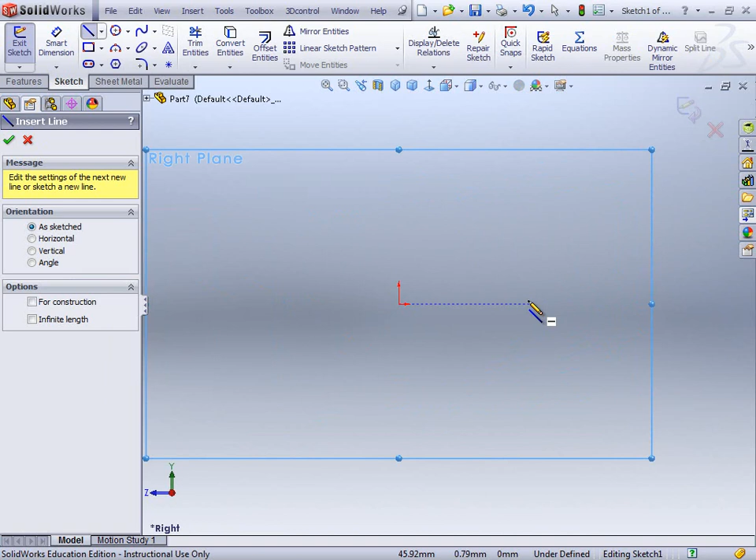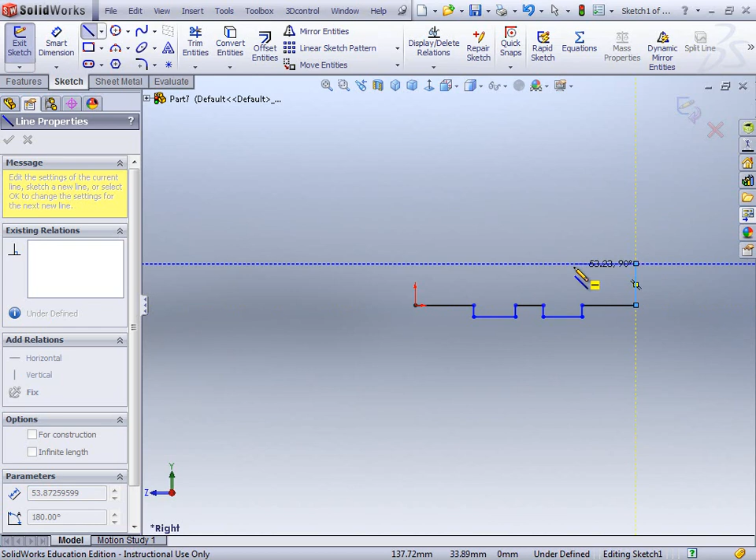Okay, so if we start off on the correct plane this time, on the right plane, and zoom into it, and again just try and keep a bit of proportion to it, so it's about 50, about 10, kind of keeping it roughly to the right sizes. And then you can just sort of fly on then, hopefully you'll get the correct sizes. That's a rough idea of it.

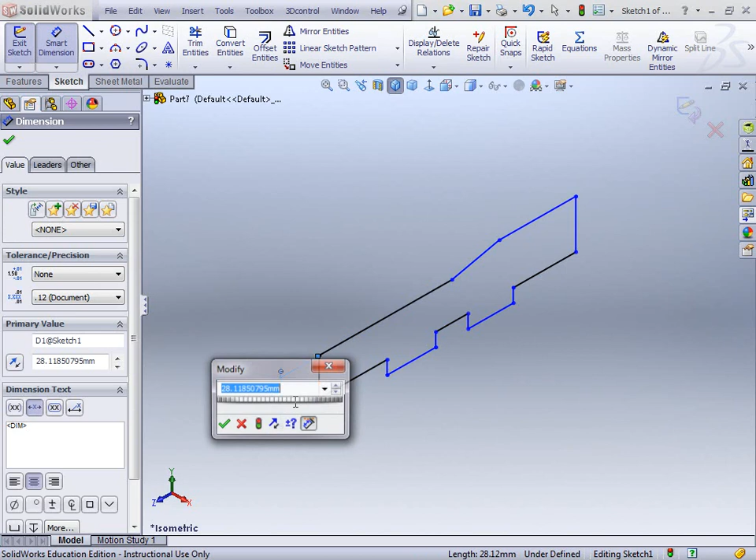Pop in a few dimensions then. So it's 25, 40, 25 again, 37, overall there is 100, and that's 10, and that's 60.

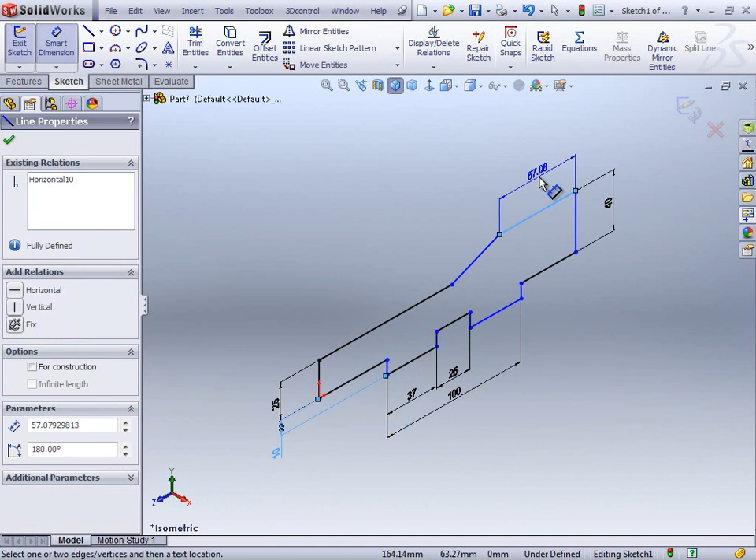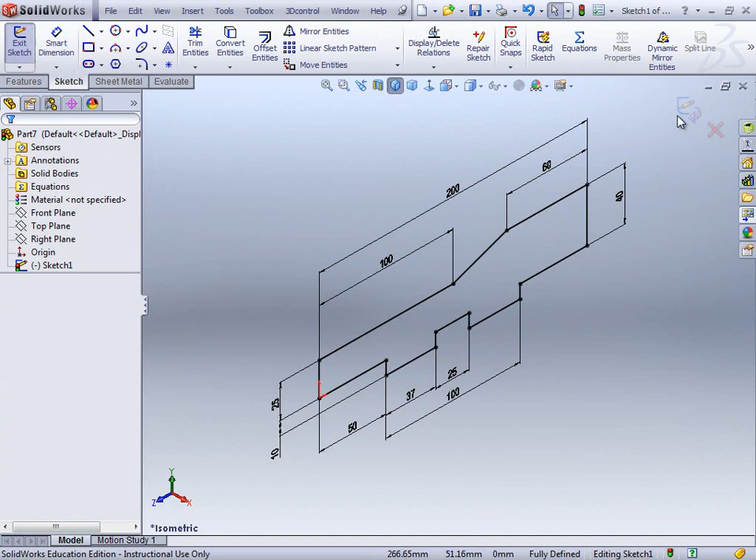Then it's 200, and it's going to be 50, and then just do a collinear on these two, and exit the sketch then, and extrude it. It's 100. Let's check that. Yep.

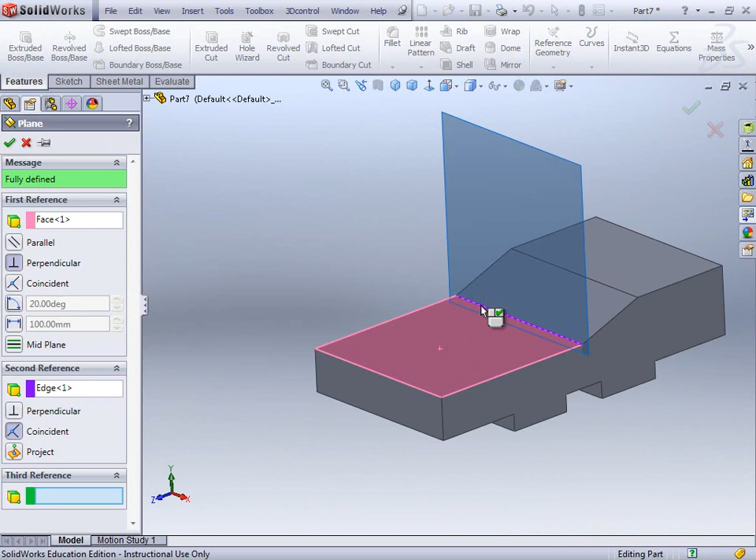So extruded 100. Okay, so we have to draw a little feature at a slightly offset angle, so we're going to need a bit of reference geometry, a new plane, so selecting this face and that edge, and 20 degrees, and we just flip the angle on that to get the right angle on that.

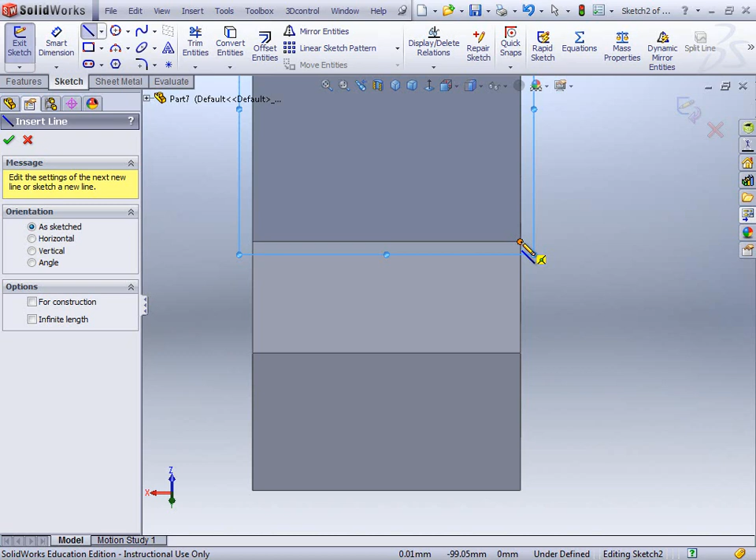And I can do a sketch then, just go normal to on this. Again, keep it roughly in proportion. Oops. Again, so what's that, 50? And the distance from there to there then is going to be 30, isn't it?

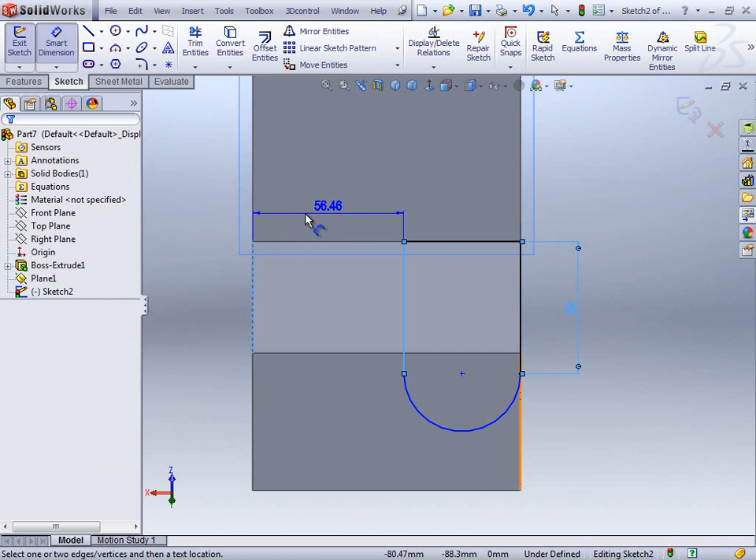And exit the sketch, and extrude boss base. And we have to go up to next on this, but you see the direction is kind of flipping in. I don't get up to next, so I need to just flip to next, because there is no next coming in that direction. Now I get up to next, and click OK. And I can get rid of that, I don't need that anymore.

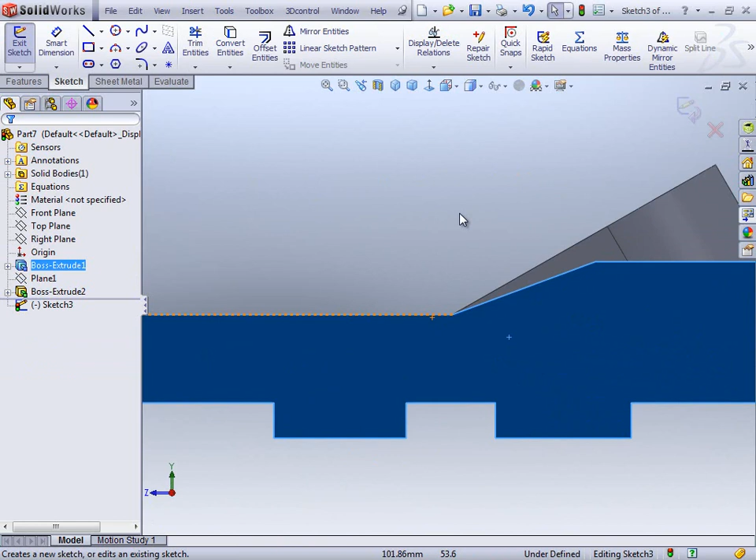Okay, so what's next? So do a sketch on that surface there. We do this little arc, so it's a little 3-point arc, somewhere there, and approximately there. And convert entities on these, because we need these little edges as well. And we trim on that.

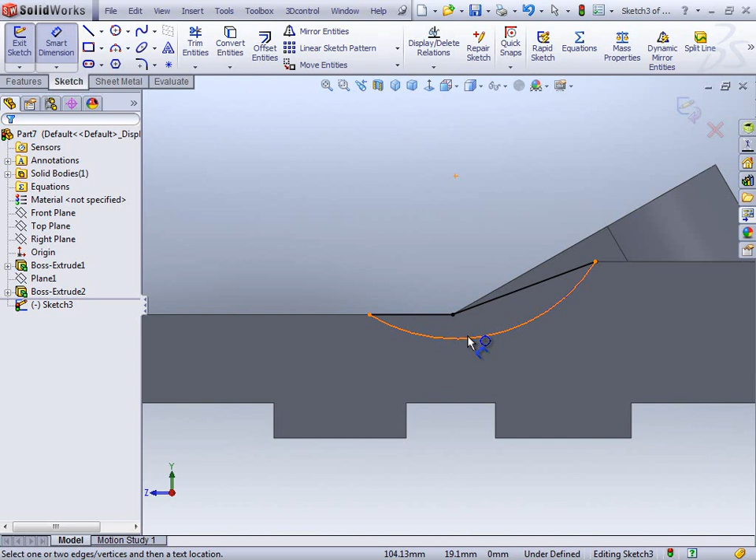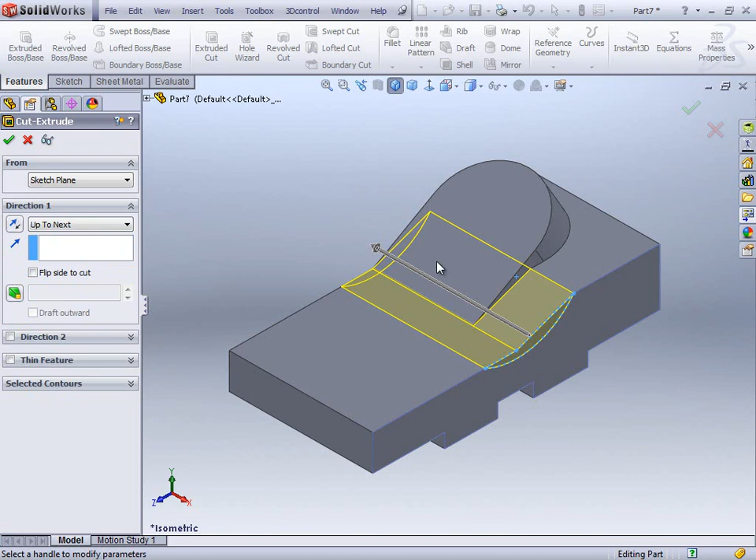Now we can pop in the dimensions. So this is a radius of 50, and it's 45 from there to there, and it's fully defined. And I can exit the sketch and extrude cut then, and we can go up to next, or we can go up the surface.

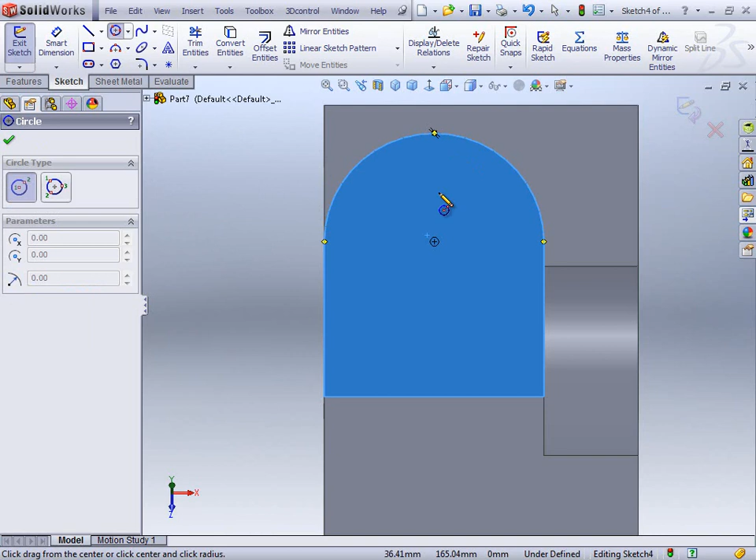Okay, so that's my next thing. I think sketch on this face, yeah. So sketch on that face, just go normal to, and pop in the little circle, wake up that center, and pop in a little circle that's 25 diameter. And this time I'll just pop in a couple of little center lines, latching onto the quadrants there of that arc.

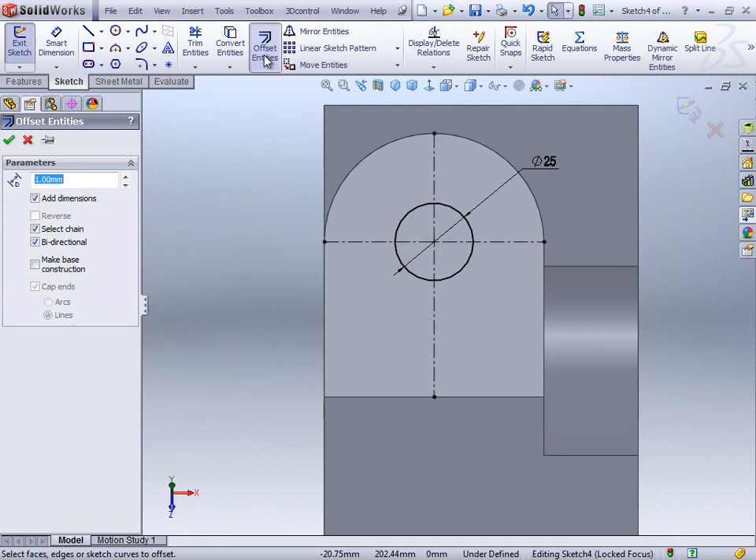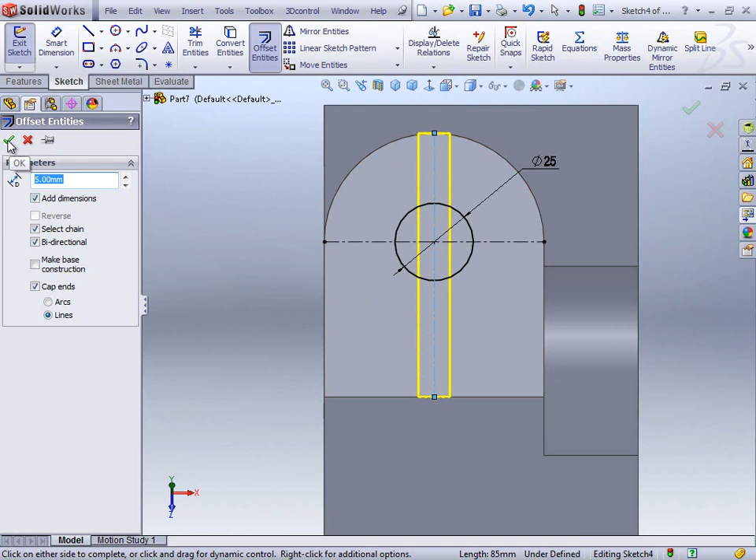And then if I choose offset entities and make it bidirectional, and if I do 5, yep, so select that, and cap ends and do straight lines, I can get that sort of rectangle going on there that's symmetric with the whole thing. So click OK on that and do the same then, offset entities, select that, bidirectional, cap ends with just straight lines as opposed to arcs.

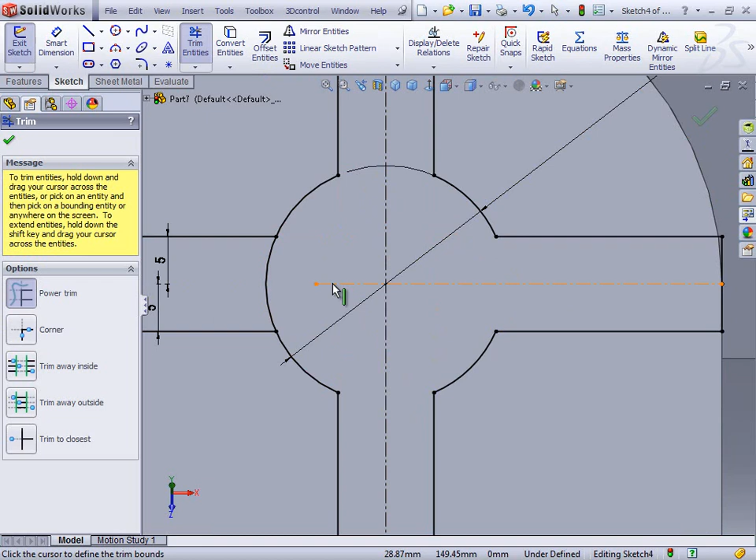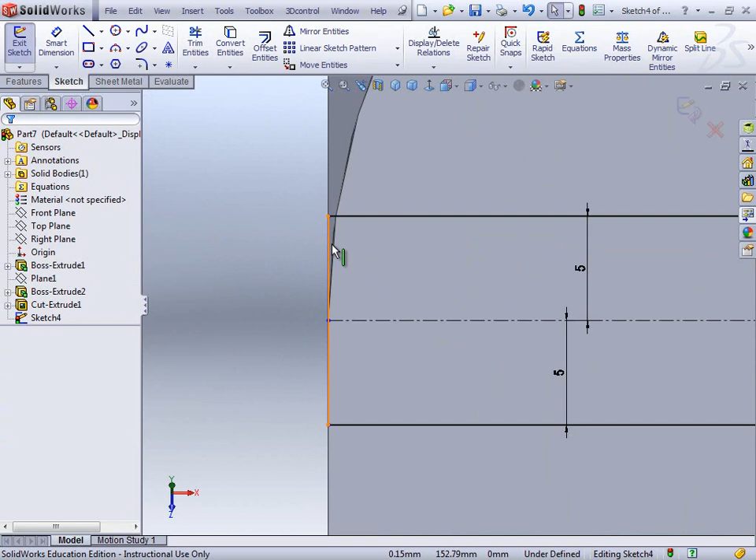Click OK, and then we can zoom in and do a load of trimming. Didn't mean to trim that line, but oops. Trim again. See, I trimmed that line too much there now, so I'm going to have to go in and fix this. You see, that's kind of gone away from there, so I just have to fix that again. Grab that and pull it away and bring it again, because I trimmed off that little center line there. Shouldn't have done that. So that's the little cross done.

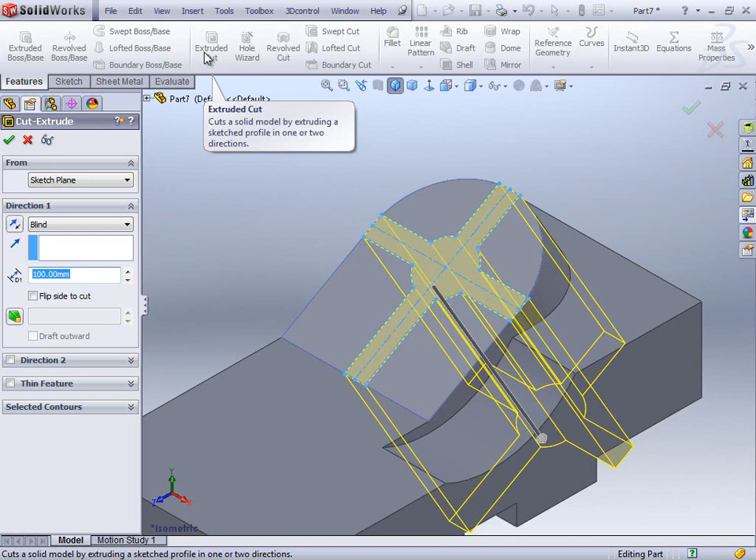And I can exit the sketch and extrude cut a distance of, go find out what this is, I think it's 5 mil. Yep, 5 mil deep. So 5 mil, and that's that.

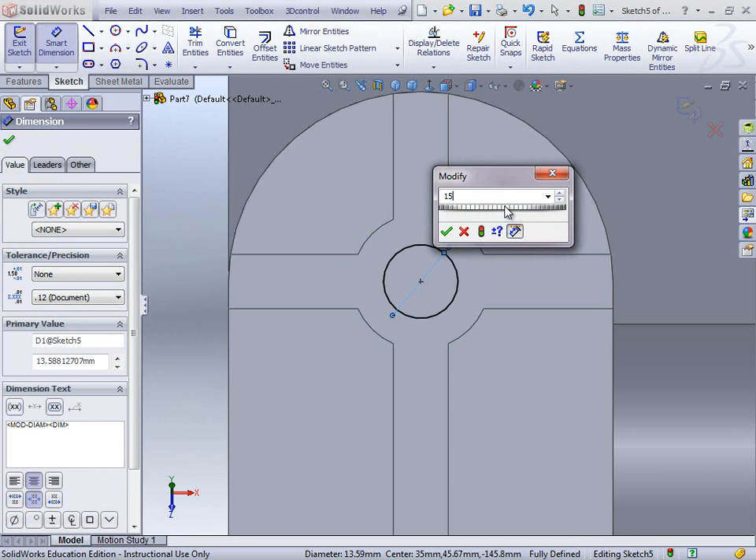Then do a sketch on that surface, and circle, pick up that again. So the circle on this, which is a diameter of 15. And this one's extruded cut through all. Isometric. And that's that. So next one then is over here.

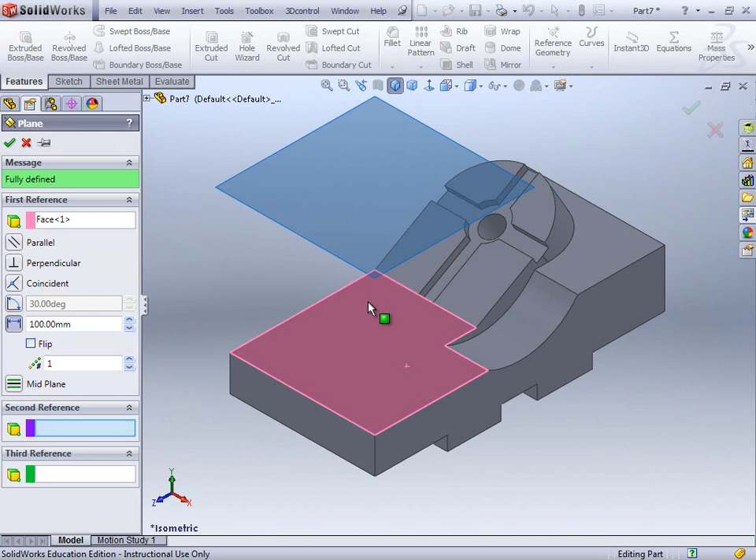So I need another plane, so I need reference geometry of that face and that edge. And I think this is an angle of 30 degrees. Again, I'll flip the direction and click OK and do sketch on that surface.

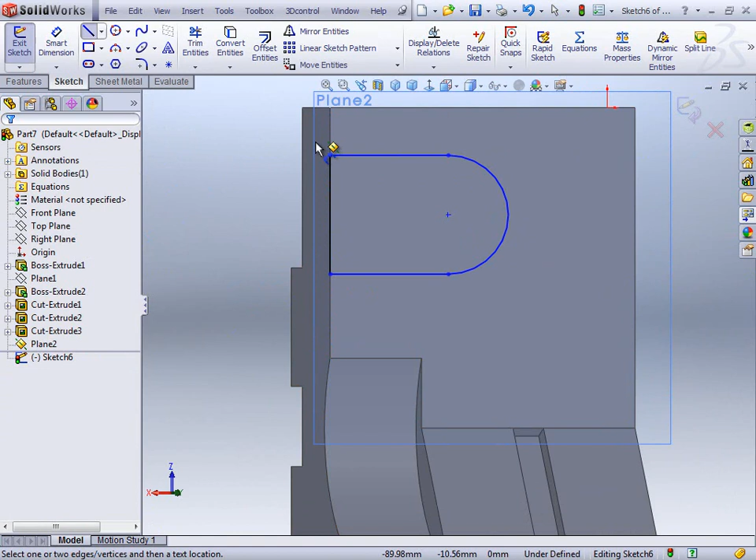And the shape. And it's a 25 rad. Fix that before I went too small there. See, that's one, fix that 15. And I suppose that is 40.

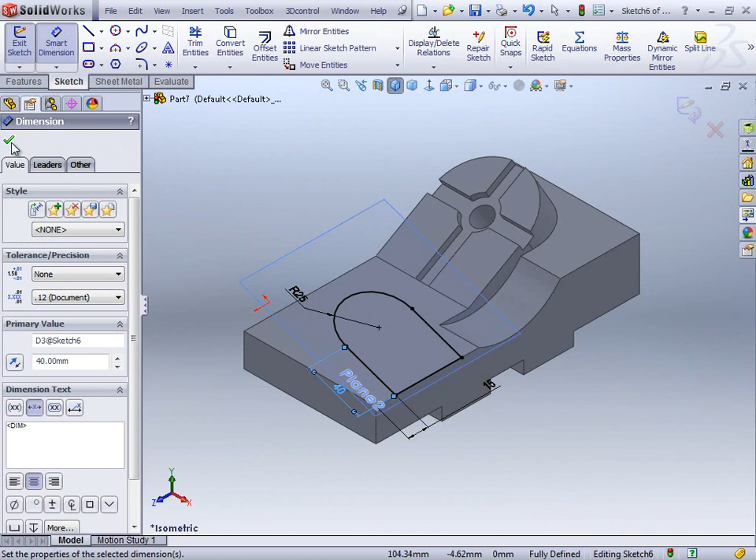And I can exit that sketch again. Just hide that plane, I don't need that anymore. And I'm going to just do an extrude then on that. Flip the direction and again up to next. Okie doke.

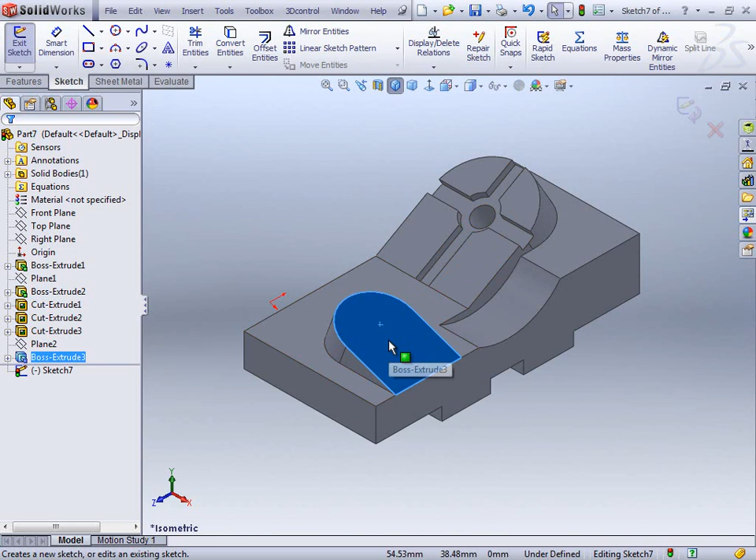And then I should have, what's next? 25 mil boss on this surface. So normal, draw a circle. And 25 diameter. And it's just an extrude, blind extrude 15.

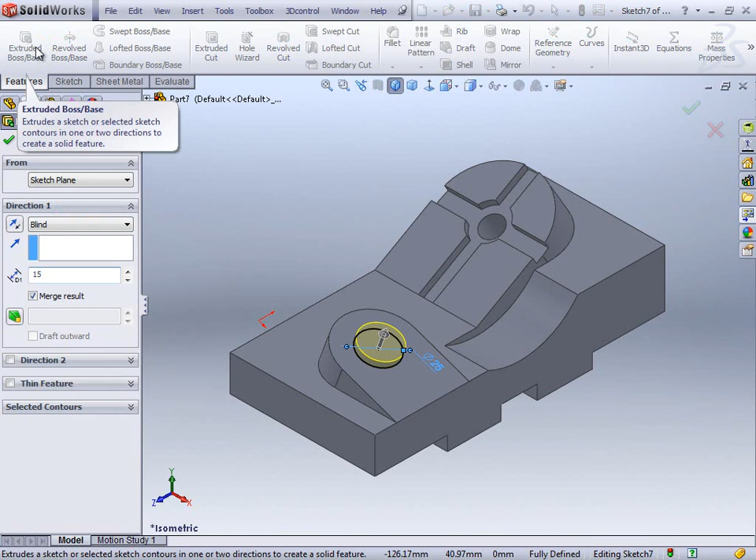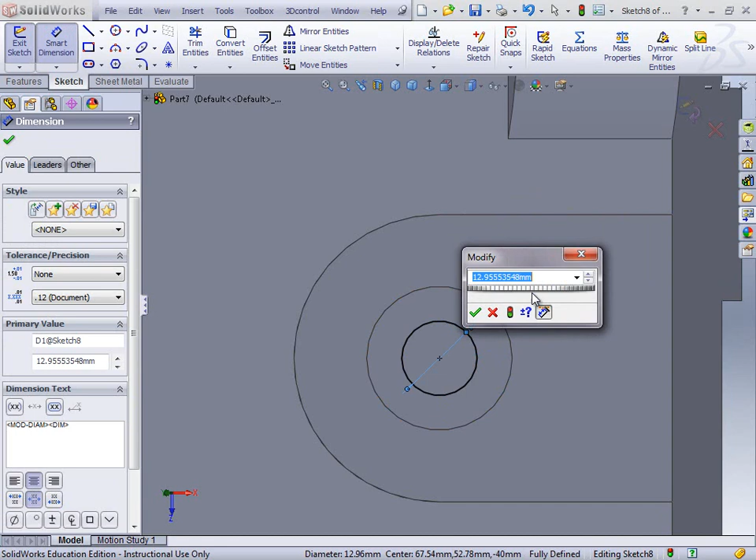And then there's a hole cut through all in this. And it's a diameter of 12. Extrude cut through all. And that's, I think that.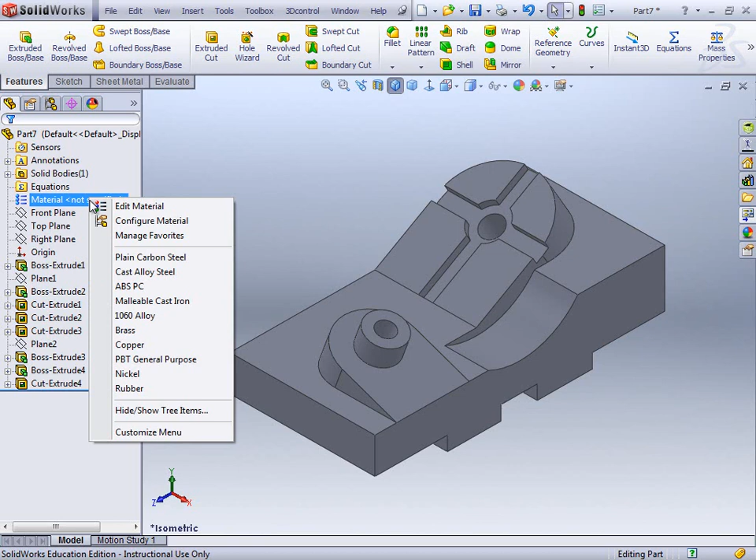Just need to change the material then. And it's 6061 alloy. So let's go find that. So edit material. So 6061 alloy, there it is. Apply and close.

And then get the mass properties on that. 2040.57 is the mass.